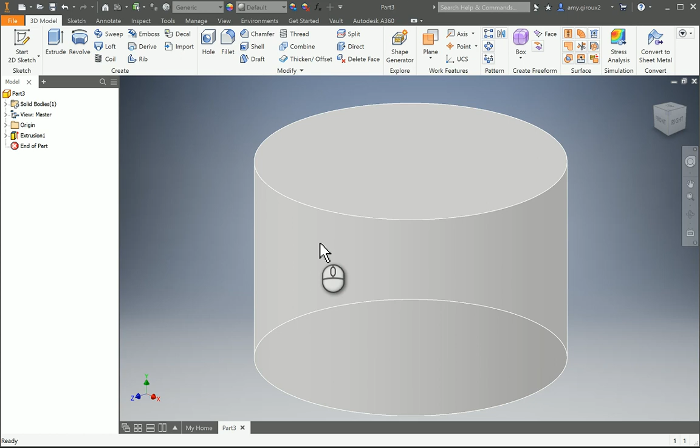For this video, we're going to go through a few more of our part modeling tools. We're going to use our hole feature and our threads feature. So for our hole feature, we can choose different placements. So we can do linear, concentric, from a point, and so forth. Often we do linear and concentric.

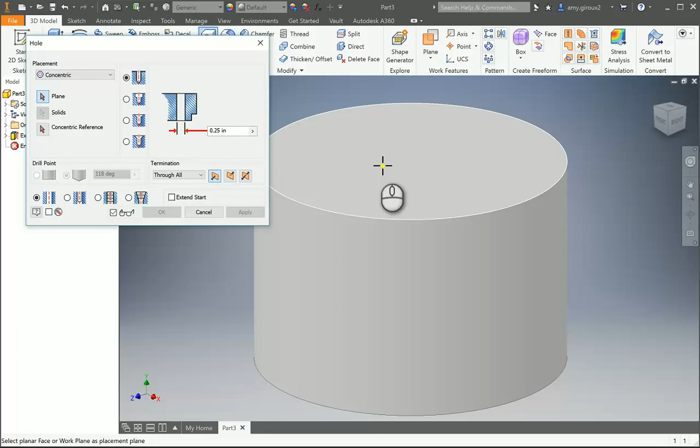In this case, we're just going to place one in the center with our concentric tool here. We can choose our plane and our concentric reference, which is the outside of our circle. We can choose our various different types of holes. If we choose our menu over here, we can hover over the different types and it'll tell us our various options that we have. In this case, we're just going to choose a regular drilled hole where we only need

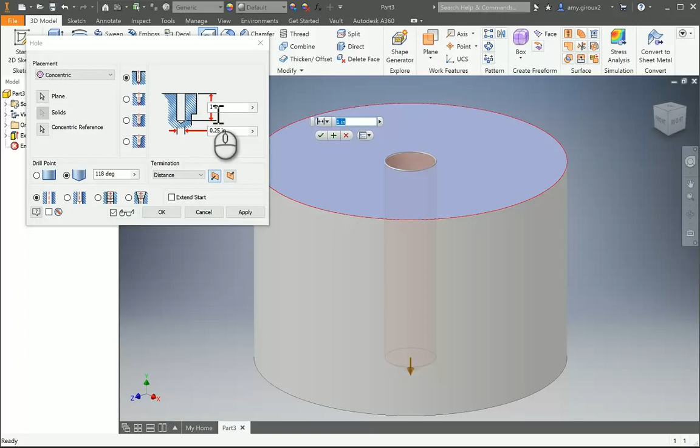to change our diameter. If we choose one of the other ones, like our counterbore or a countersink, we give a few different types of dimensions here that we could change as well. But again, for this one, we're just going to do a simple drilled hole. So for this one, if we leave it at our 0.25 inches, we'll just have a hole through the center of our object. If we wanted it to be a little shorter, we could change it to a specific distance. In our case, it's going to be 0.75. Once we have this, we can choose OK.

The other tool we'd like to take a look at is our thread tool. So if we choose our thread tool here, it'll usually take a little bit to load, but once it does, we can choose where we'd like to thread and actually begin to change the types of threads based on standard threaded screws and bolts that are available to us.

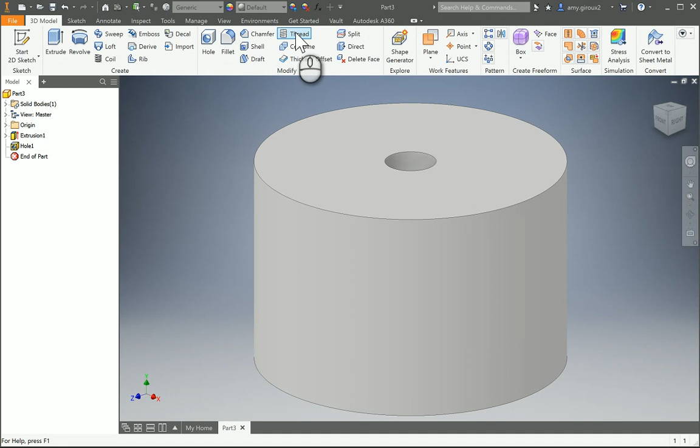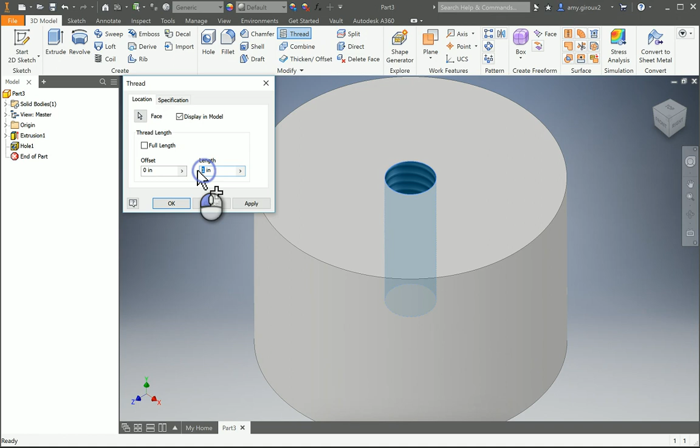Apparently there it goes. So for our face, for our hole, we're going to choose the hole we created for our threads. We can show that it's in the model, and we can also decide what length we would like our threads to be. In this case, our hole was 0.75 deep, but maybe we only want our threads to be 0.5. This will change our depth for our threads. We can see in there.

Let's say also we want to make sure that it doesn't start to thread for a little bit in the front. We could choose a specific distance here to push those threads down a little further in the hole. Our other options when we do specifications is we can start to choose various types of threads, but also different sizes and different threads per inch.

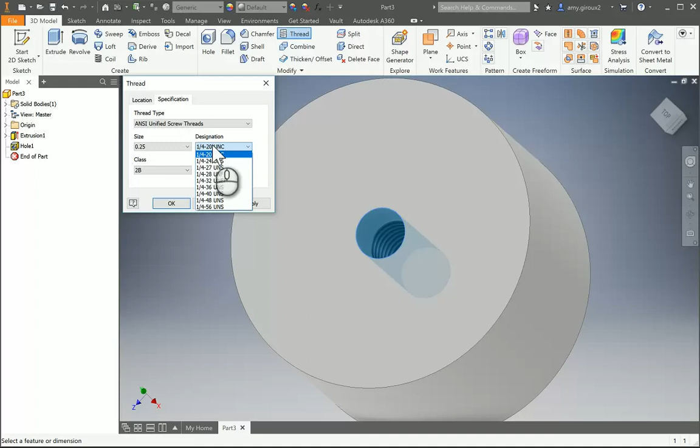So right now we're at 20 threads per inch. Let's say we wanted 40. If you notice here, they get much finer when we change our thread frequency. We can also change which direction our threads are threaded in. It just changes which direction we're spiraling. In this case, let's leave it at right hand and we choose OK. So now we have threaded and created a hole.